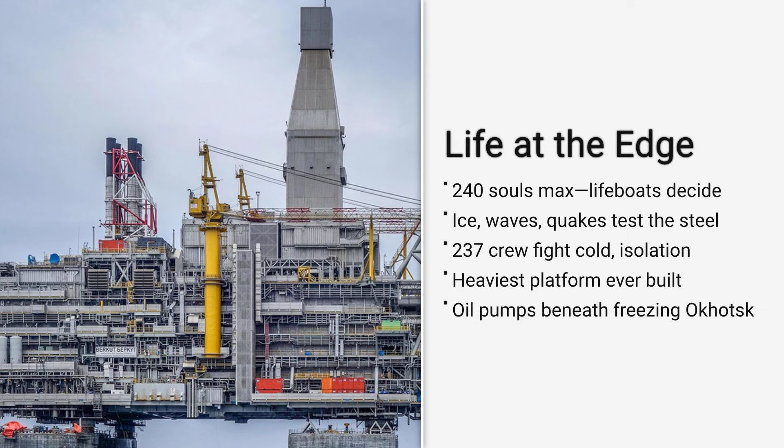Berkut holds 240 people maximum, not because of space, but because that is how many lifeboats fit. That is not a luxury problem. It is a survival constraint on the world's heaviest offshore platform, operating in one of the most hostile environments humans have ever drilled for oil. This is a story about extremes, engineering, economics, environment, and the 237 people who live inside it all.

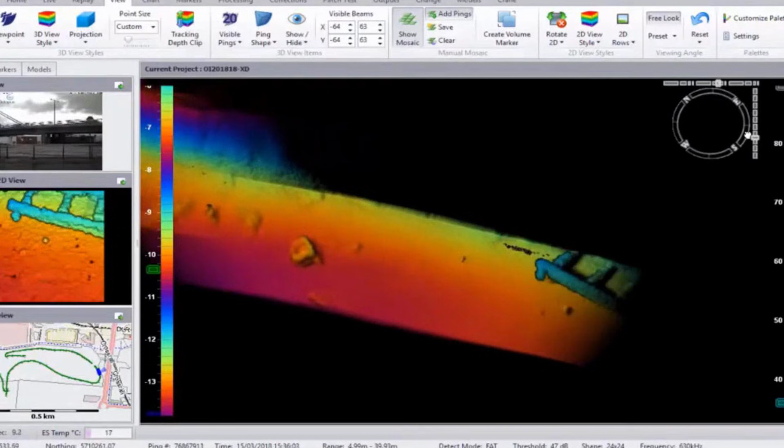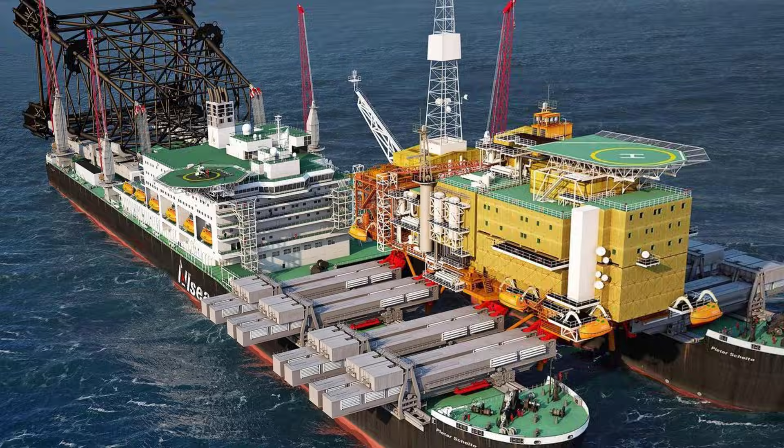Berkut sits in the Sea of Okhotsk off Sakhalin Island in far eastern Russia, in Arctic and subarctic waters. Winter temperatures hit -44 degrees Fahrenheit. The platform is a gravity-based structure, 200,000 tons of reinforced concrete and steel anchored to the seabed by its own weight. It is 472 feet tall, taller than a 40-story building. The topside alone weighs 42,000 tons. It withstands waves up to 59 feet, ice blocks 6.5 feet thick, and earthquakes up to magnitude 9.0 on the Richter scale. It needs to, because out here, nature does not negotiate.

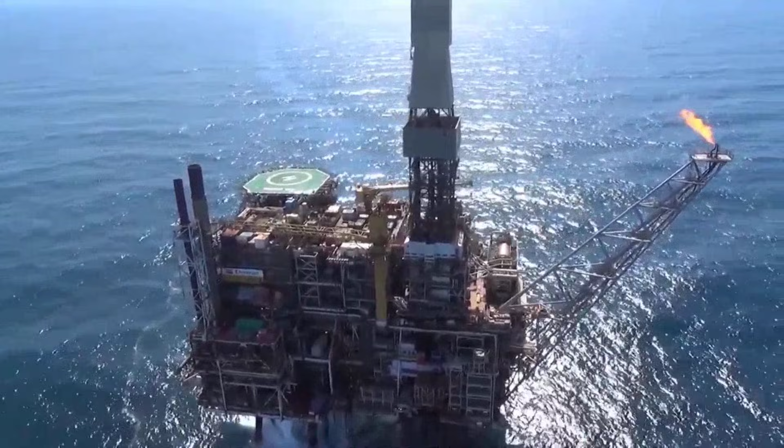So why build something this massive in a place this brutal? Global oil consumption in 2024 hit roughly 102 million barrels per day. Russia is one of the world's top 3 crude producers. Beneath Berkut lies the Arkutun-Dagi field, an estimated 140 million tons of oil, about 1 billion barrels, trapped deep under the seabed in a tectonically active zone. The Sakhalin-1 project was developed by an international consortium originally led by ExxonMobil, Rosneft, a Japanese company, and an Indian state oil firm. Berkut was designed specifically to access this difficult geology, where floating rigs would be shredded by ice. Construction started in 2012. Operations began in June 2014. First oil flowed in January 2015.

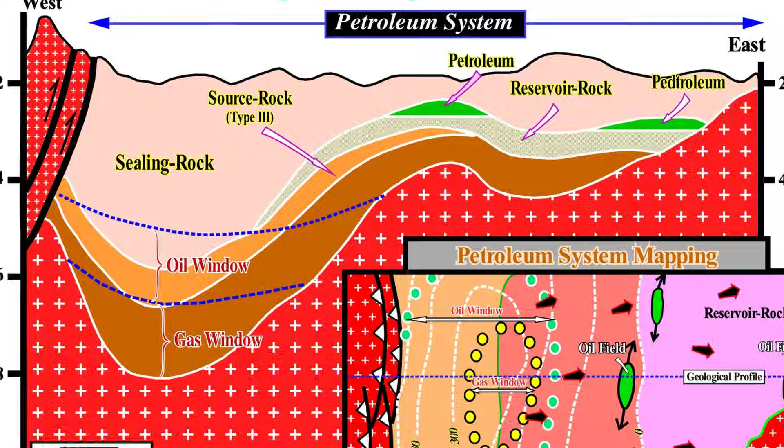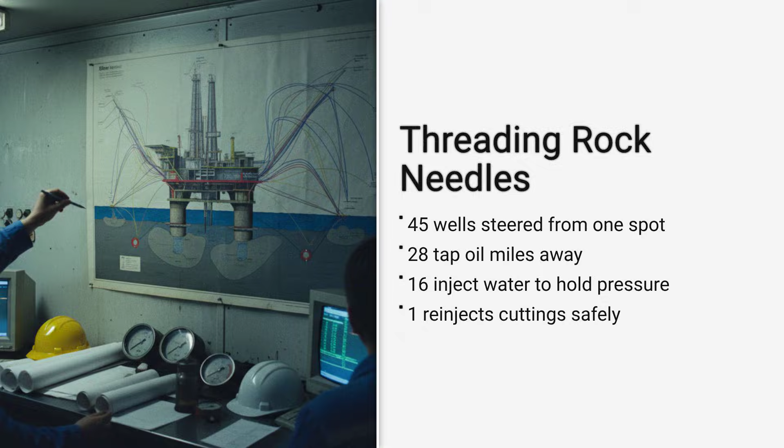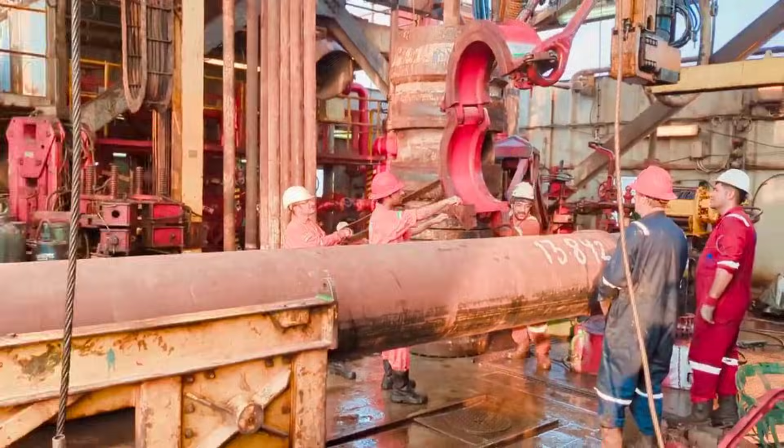Finding the oil required seismic imaging, sound waves mapping underground rock layers and trapped hydrocarbons back in the 1990s. Berkut drills 45 wells from a single fixed position, including 28 oil producers, 16 water injection wells to maintain reservoir pressure, and 1 cuttings reinjection well for waste disposal. To reach the reservoir from one spot, the platform uses directional drilling. Wells stretch horizontally up to 4.3 miles or 7 kilometers, threading a needle through rock while standing still. Each well needs multiple steel casing strings, cemented into place to prevent collapse and isolate zones. In earthquake-prone areas, those casings have to flex without fracturing.

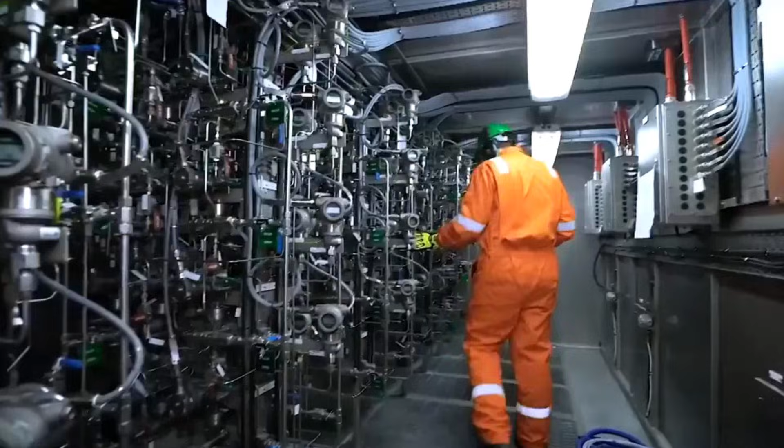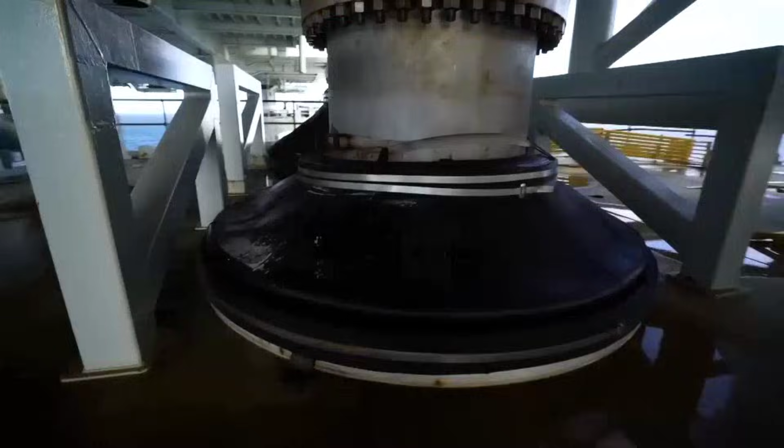But the wells are the easy part. It is keeping the platform alive that costs millions. Berkut's topside houses drilling equipment, crew quarters, power generation, control rooms, storage, and a helipad. Below, the gravity-based structure, a massive reinforced concrete caisson, is ballasted with water and sand to anchor it permanently to the sea floor. Berkut was the first offshore oil and gas platform in the world to use friction pendulum bearing isolators between the topside and the base. These allow the topside to slide and absorb earthquake energy instead of transmitting destructive vibrations directly to drilling equipment and crew quarters. It is designed to handle up to magnitude 9.0 earthquakes.

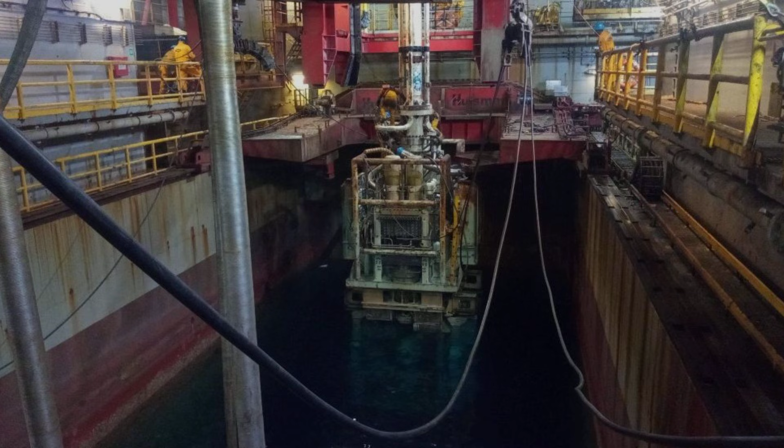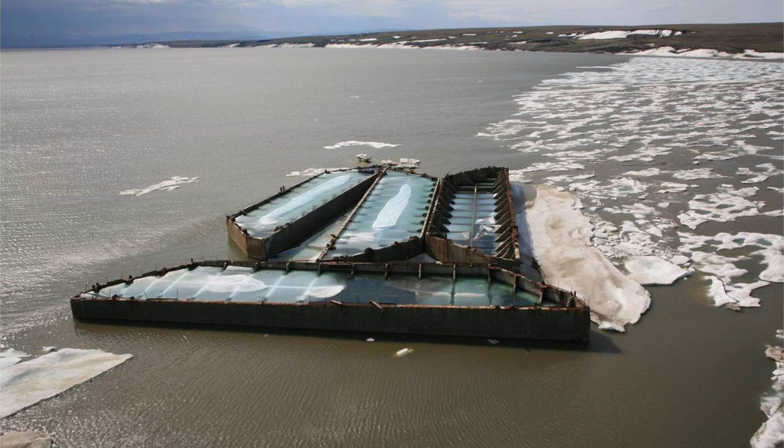On the seafloor, a blowout preventer, a massive stack of hydraulic valves, sits on the wellhead. If pressure surges unexpectedly during drilling, the blowout preventer can shear through the drill pipe and seal the well in seconds. Standards like American Petroleum Institute, Standard 53, 5th edition, govern these systems. Around the base, Berkut has a specially formulated high-strength concrete belt designed to withstand collisions from ice blocks up to 6.5 feet thick drifting at several knots. This replaced more expensive metal shielding used on other Arctic platforms.

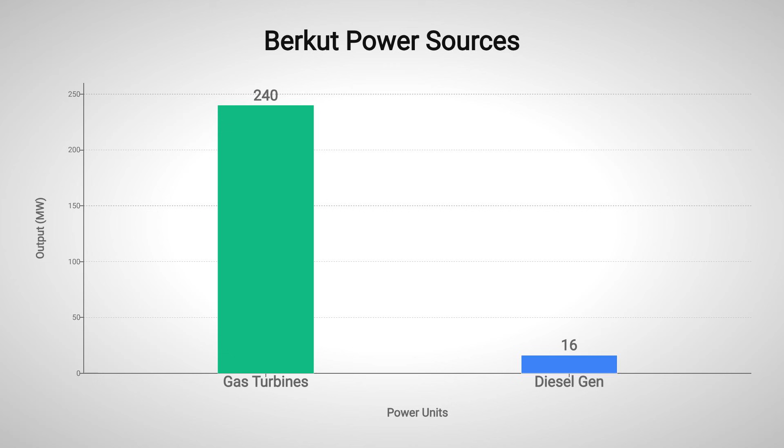For power, Berkut runs 4 gas turbines at 60 megawatts each, plus 3 diesel generators at 5.4 megawatts each. Total capacity is 256.2 megawatts. That is enough to power roughly half of a medium-sized city. The platform is energy self-sufficient.

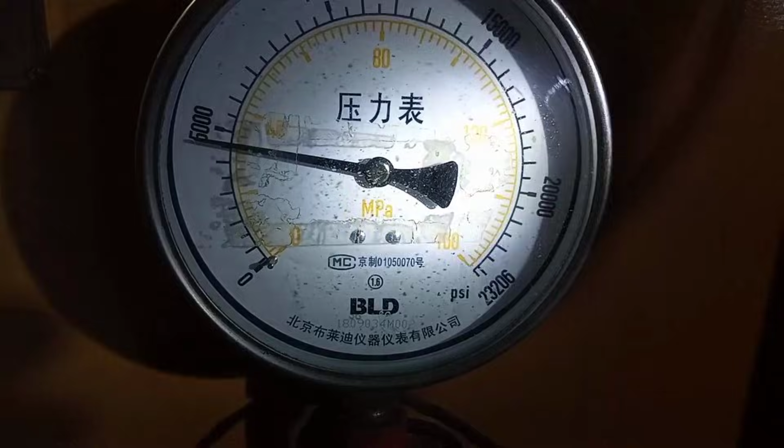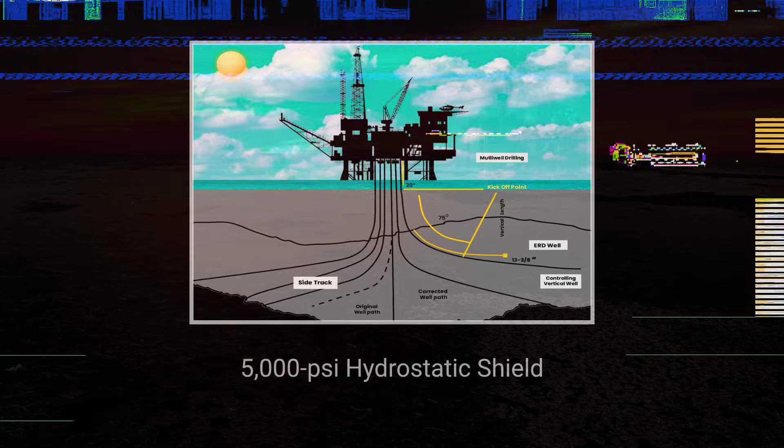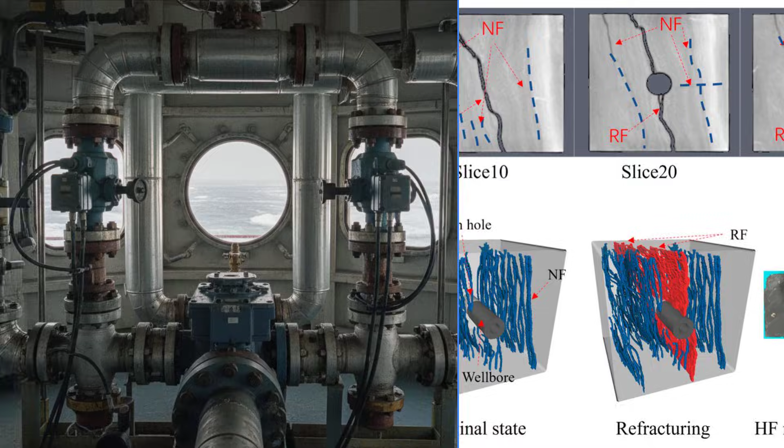Pressure control is everything. Drilling fluid circulates down the drill string and back up the wellbore. It cools the drill bit, carries rock cuttings to the surface, and exerts hydrostatic pressure to prevent uncontrolled flow of oil or gas. In tectonically unstable formations, the pressure window is narrow. Too little pressure and the well kicks with an uncontrolled influx. Too much pressure and the formation fractures. Berkut uses managed pressure drilling techniques to control bottom hole pressure in real time.

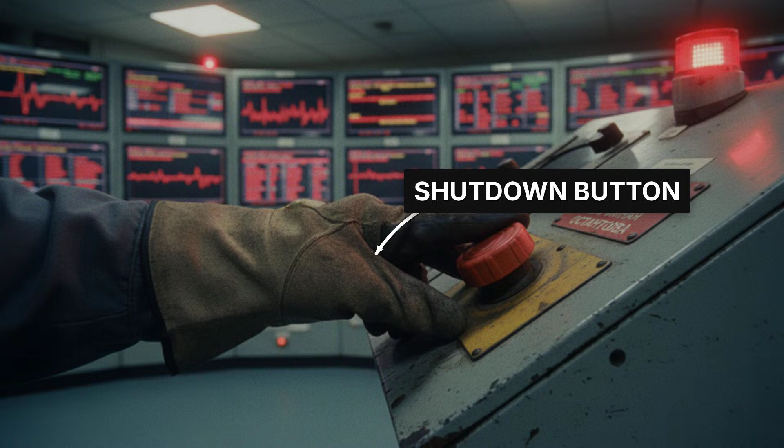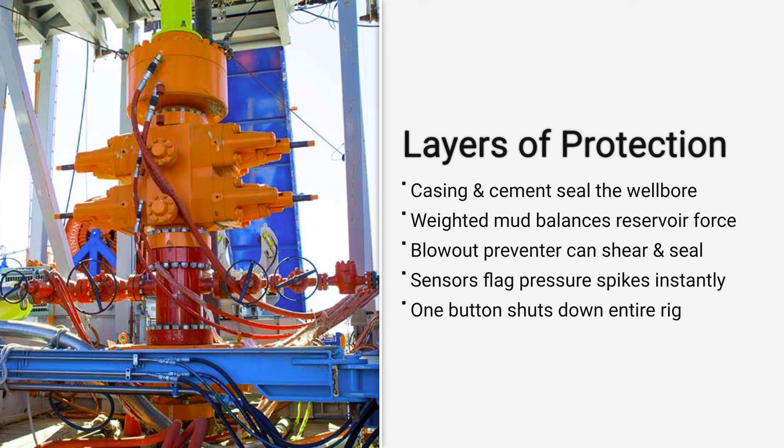If something goes wrong, a single button initiates platform-wide emergency shutdown. All drilling stops. Wells are secured. Non-essential systems power down. This protocol evolved from past offshore disasters. Any unexpected shutdown can cost millions in lost production and restart time. There are layers of protection between reservoir pressure and the environment, including casing, cement, the drilling fluid column, the blowout preventer, and surface control systems. Det Norske Veritas, the classification and assurance company, certifies offshore structures for compliance with International Organization for Standardization standards for offshore and Arctic operations.

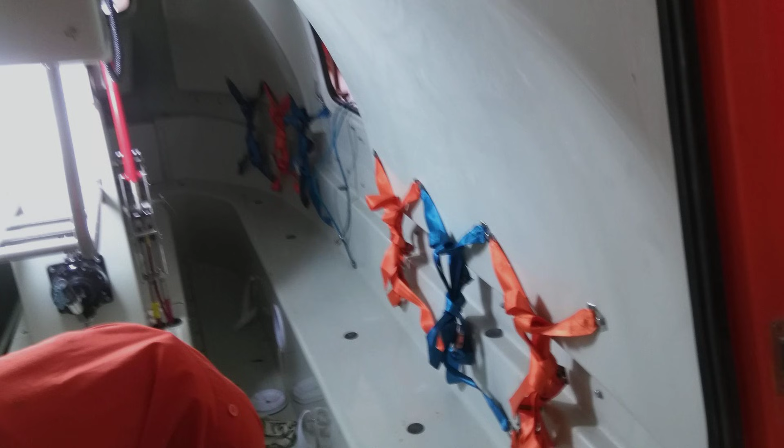But hardware does not operate itself, and out here, the human factor is where things get strange. Berkut operates with 237 workers normally. Shifts run 28 days on, 28 days off, and sometimes longer during severe weather. Crew change flights use helicopters from Sakhalin Island or supply vessels in summer. Maximum occupancy is 240 people, not because of living space or food capacity, but because that is how many lifeboats can accommodate in a full evacuation. This is a hard regulatory limit tied directly to survival if the platform must be abandoned.

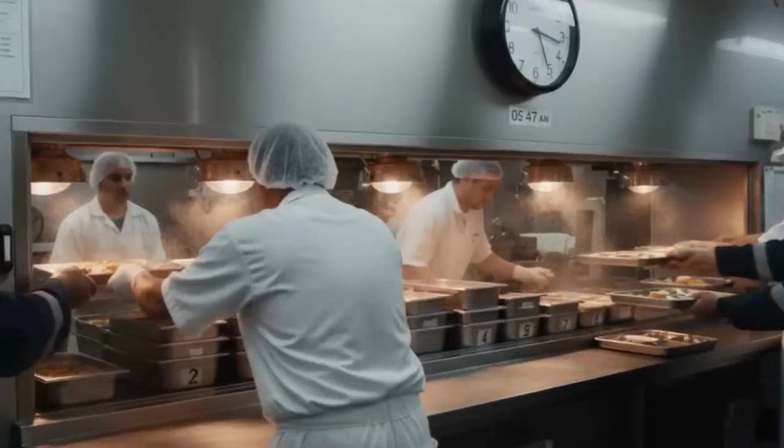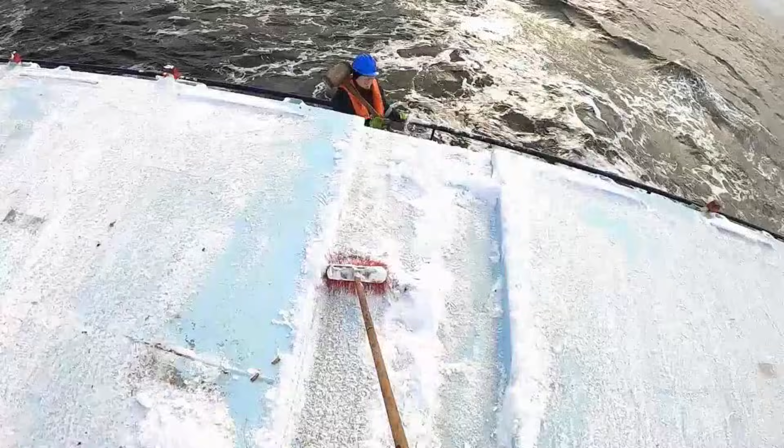Workers share bunk rooms, typically 2 to 4 per cabin. The cafeteria operates 24 hours a day, serving high-calorie meals to offset the physical demands and the metabolic cost of staying warm in sub-zero temperatures. Workers burn significantly more calories just maintaining body heat. Fire drills, abandon platform drills, and blowout response drills happen weekly. Crew members must know their muster station, lifeboat assignment, and emergency role by memory.

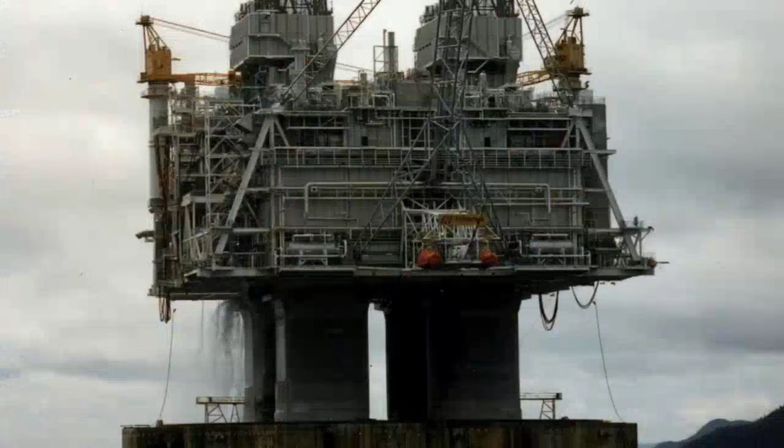Complacency is the enemy. Repetition builds muscle memory. Blizzards can delay crew change flights for days or even weeks. When visibility drops and winds exceed safe limits, helicopters are grounded. Workers stay until weather clears, no exceptions. This creates psychological strain, extra provisions, extended pay, and strained family communication.

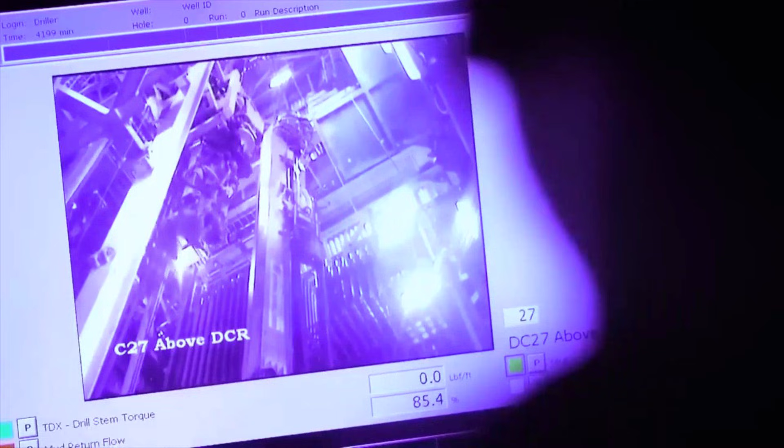Internet connectivity is severely limited or unavailable. Satellite phones and scheduled radio calls are the primary contact with the outside world. Some workers describe the isolation as surreal. They work on a 200,000-ton structure surrounded by ice and darkness for weeks, disconnected from real-time news or social media.

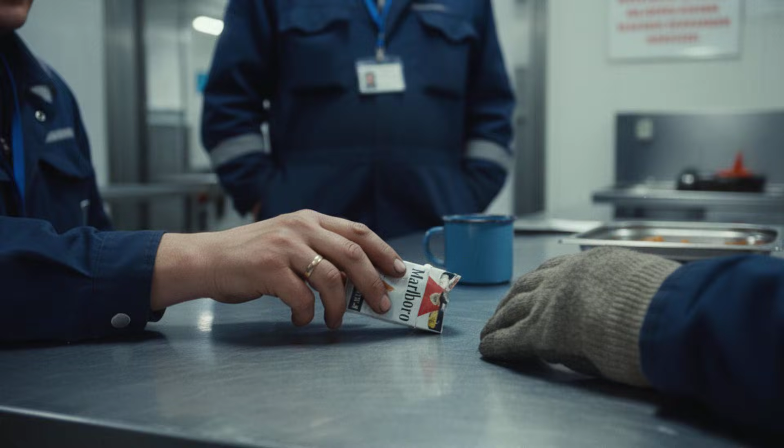Experienced drillers and engineers command respect and higher pay. Newer workers handle grunt work, including cleaning, maintenance, and cargo handling. Informal economies emerge, trading cigarettes and favors. Small conflicts over bunk assignments or cafeteria seating can escalate when people are trapped together.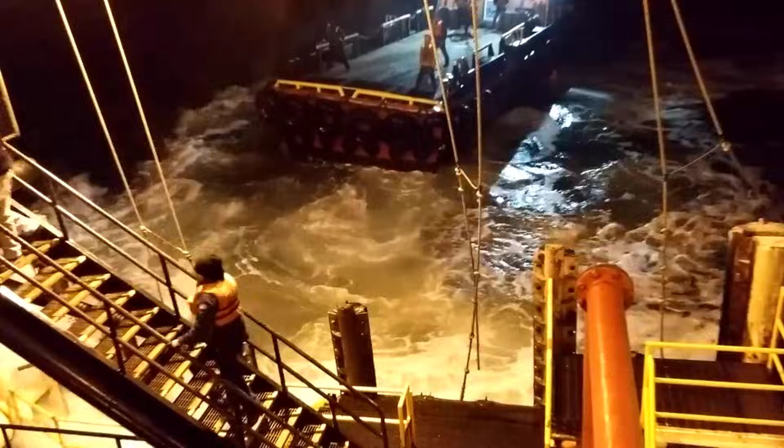Workers develop superstitions. Some refuse to whistle on deck, an old maritime taboo believed to whistle up a storm. Others insist on tapping the blowout preventer control panel three times before a critical operation.

The cafeteria becomes the social hub. Workers from different shifts overlap during meals, swapping stories, gambling with cards, and watching bootleg movies on personal devices. The cook's reputation can make or break morale.

Downtime rituals include improvised gym sessions using salvaged equipment, reading dog-eared paperbacks passed around for months, and maintaining Arctic journals, handwritten logs some workers keep to process the isolation and boredom between shifts.

And all of this, the drills, the food, the lifeboats, cost a staggering amount of money every single day. Berkut cost approximately 12 billion United States dollars to construct. That's roughly the gross domestic product of a small nation.

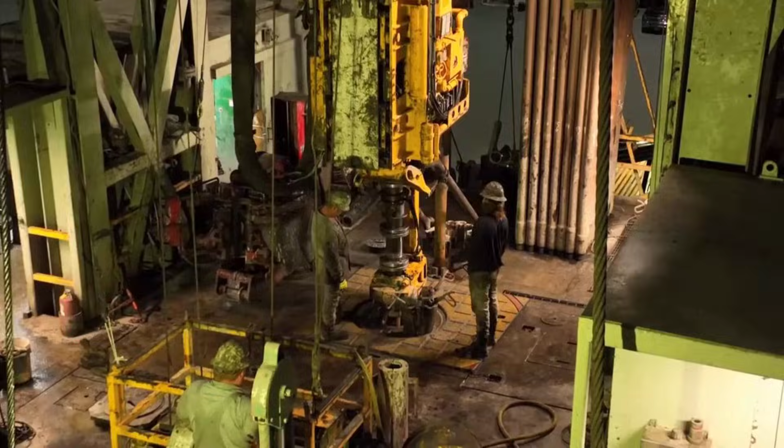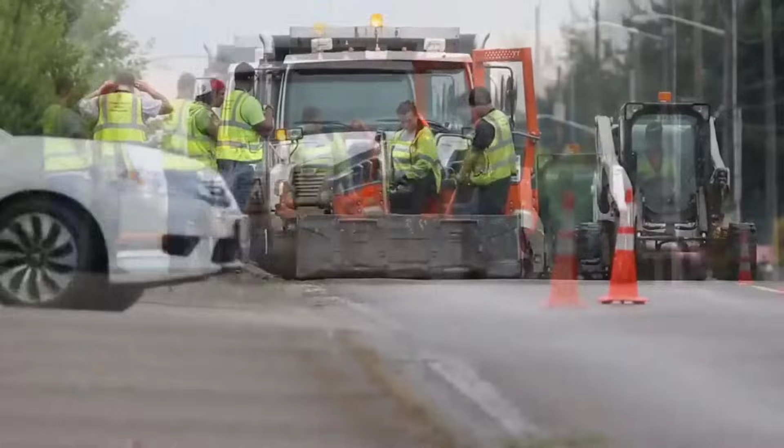While Berkut is a fixed platform, not rented like a mobile rig, comparable ultra-deepwater drilling rigs were commanding day rates approaching 500,000 to 600,000 United States dollars per day from 2023 to 2025. A single day of unexpected downtime on a major offshore operation can equal the annual budget of a small town's public works department. At peak capacity, Berkut produces 4.5 million tons of oil annually, approximately 85,000 barrels per day. At 2024 oil prices, roughly 80 United States dollars per barrel on average, that's nearly 7 million United States dollars per day in gross revenue.

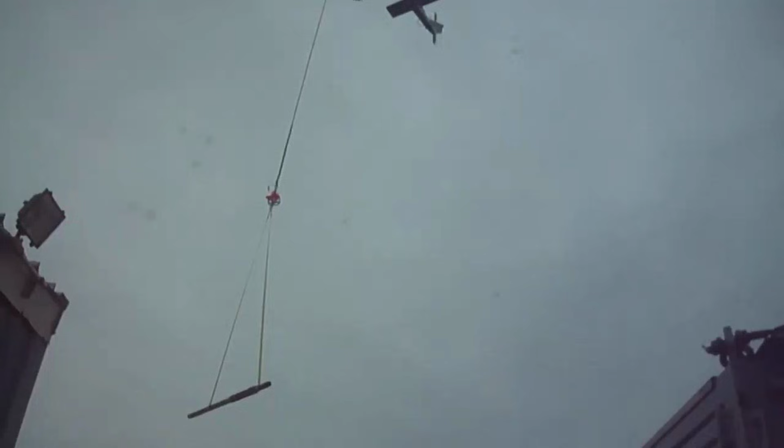Everything arrives by helicopter or supply vessel: food, fuel, drilling equipment, spare parts, chemicals, fresh water. Logistics are choreographed months in advance. A missing seal or valve can halt drilling and cost millions, while a replacement is sourced and transported.

The platform was projected to generate more than 9 billion United States dollars in revenue over its first decade. It is designed to operate until 2050. One day of production revenue equals roughly 70 times the median United States household income, or the cost of building several schools.

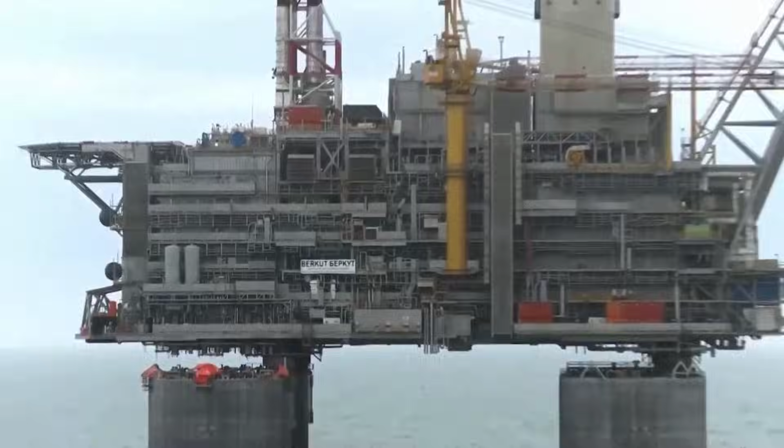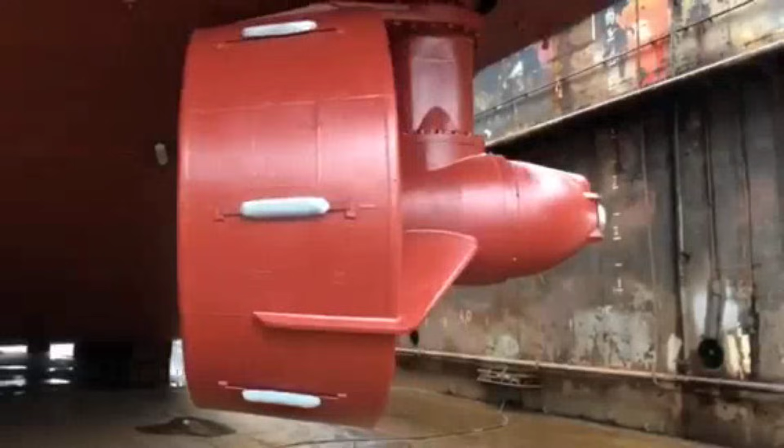Now let's clear up some myths. Myth one: offshore platforms are just big boats that float. Reality: Berkut is a gravity-based structure. It is made of reinforced concrete and anchored by its own 200,000-ton weight. It does not float, it sits permanently on the seabed. Unlike floating rigs, it has no dynamic positioning thrusters or mooring lines. It is essentially a skyscraper built in the ocean.

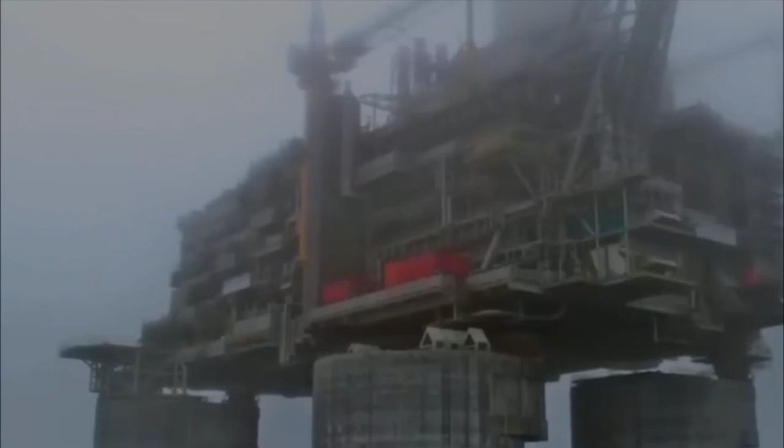Myth two: Arctic platforms are abandoned in winter. Reality: Berkut operates year-round, including during brutal winter months when temperatures hit negative 44 degrees Celsius and ice surrounds the structure. The platform was specifically designed for continuous operation in these conditions. Seasonal shutdowns would be economically catastrophic.

Myth three: all drilling waste gets dumped into the ocean. Reality: on Berkut, drilling waste and industrial wastewater are re-injected into subsurface cavities where oil was extracted. This technique is designed to prevent ocean contamination and to preserve local marine ecosystems, including crab and sea lion colonies.

But here's the thing no myth prepares you for: living on Berkut is not romantic.

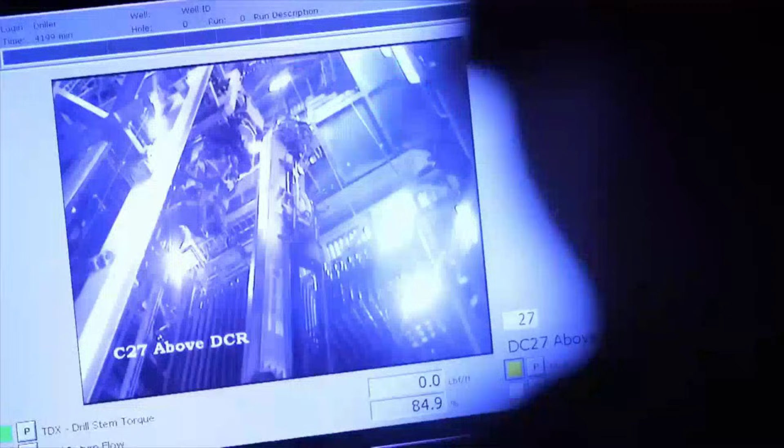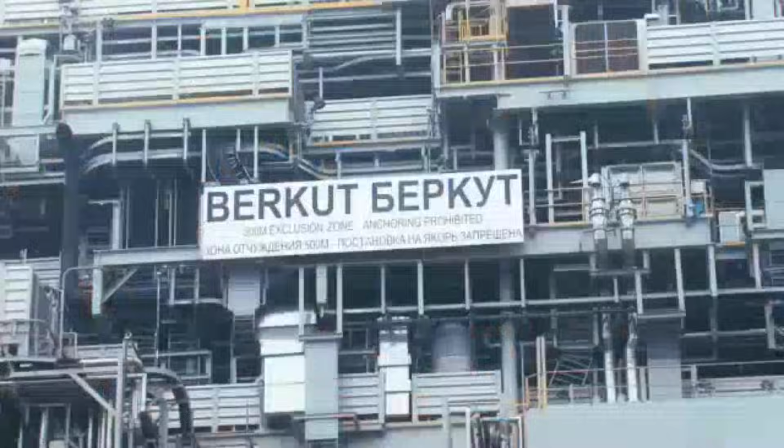Remember that lifeboat limit? It is not about regulations or cost cutting. It is because when something goes catastrophically wrong on a platform designed to survive magnitude 9 earthquakes and 59-foot waves, evacuation is the last line of defense, and there is no margin for error.

240 people live and work inside one of the most extreme engineering achievements humanity has built, surrounded by ice, darkness, and seismic instability. They do repetitive, dangerous work for weeks at a time, disconnected from the outside world, sustained by high-calorie food and the knowledge that every protocol, every drill, every redundant system exists because someone, somewhere, learned a lesson the hard way.

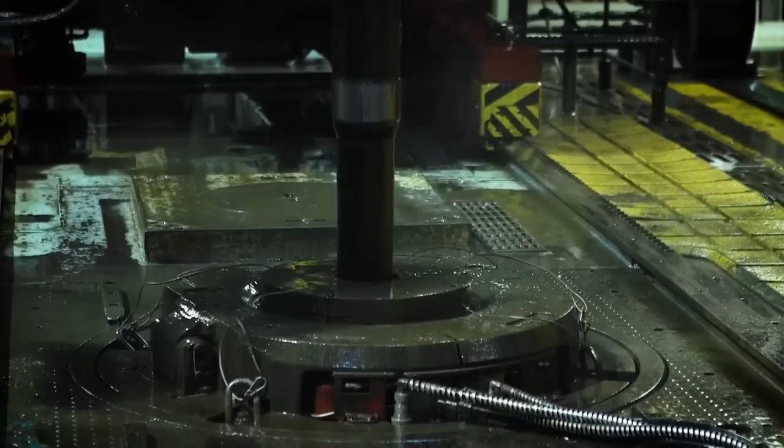Berkut means golden eagle in Russian, a bird of prey that hunts alone in harsh climates. The name fits. The platform extracts wealth from a place that wants nothing to do with humans, combining billions of dollars in engineering with the grit of people willing to live in isolation for a paycheck. It is not heroic. It is transactional. And it works until it does not.

Somewhere tonight, a worker is staring out a porthole at the black Arctic Sea, counting down 22 more days until crew change, wondering if the blizzard will clear in time. That is the cost nobody talks about.